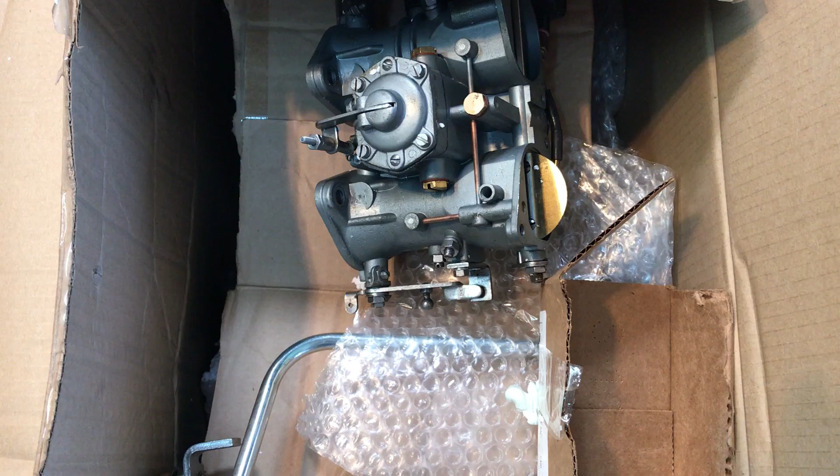Hello, Brian. Here are your carburetors that you sent that have been rebuilt. Let's make some observations here real quick as we unpack them. This is way too much thread showing here, almost like you won't have any accelerator pump, or way too much accelerator pump. The only way we're going to know is get on the bench and test it.

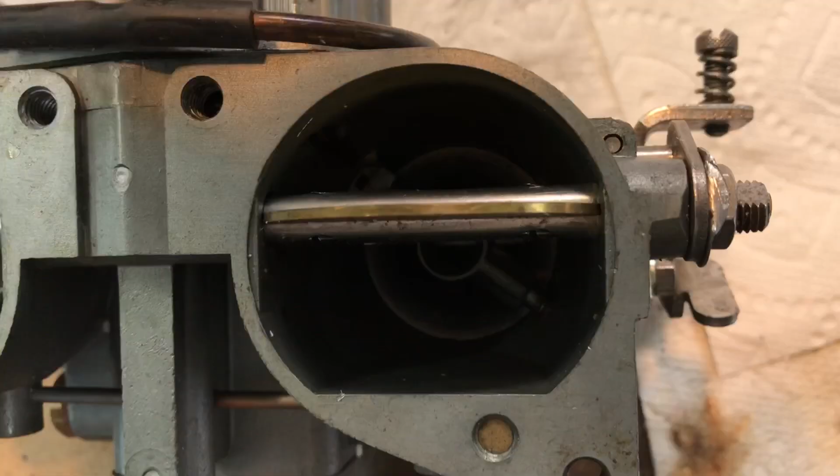I like to double check the float bowl levels and then see how much is actually being discharged through the nozzle right up in here, and that is a function of how much adjustment we've got right here. Let's see what else we got. Don't need this, just a vent tube at the top of the carburetors.

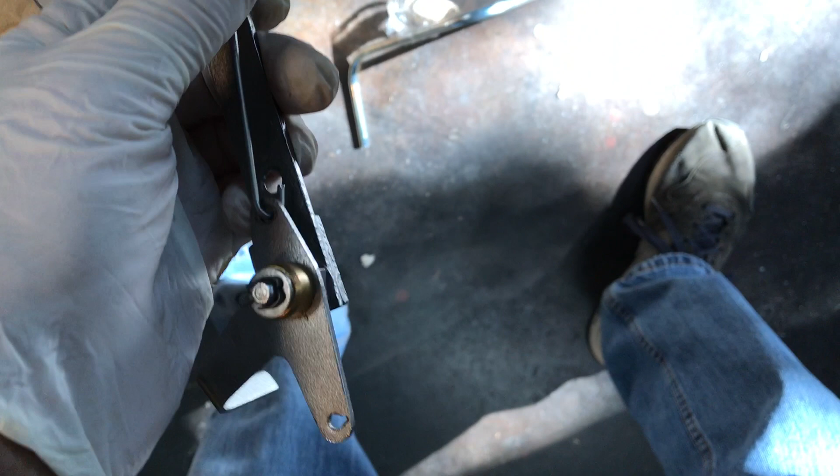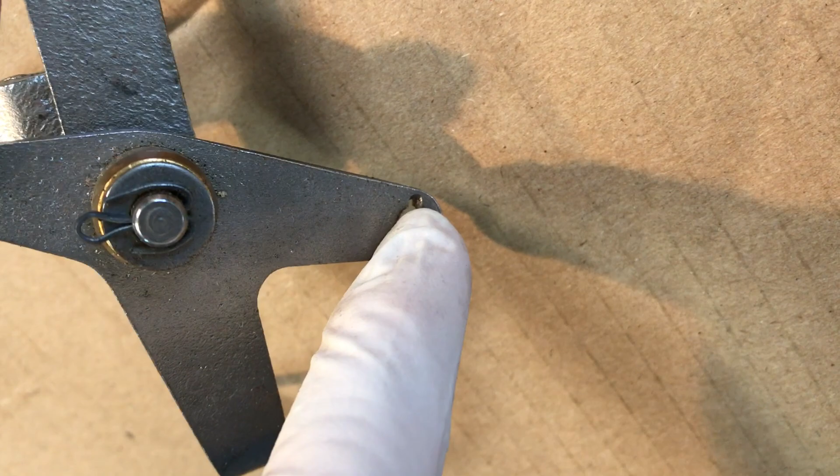You don't need a hot choke mechanism, which is, by the way, missing a spring that goes from here. You can see where the spring is dug into the arm right here, and then the spring attaches over to this point over here, and you should see the spring have dug in underneath. There, that's where the spring grabs, so you're missing your spring.

Let's slice this open. See what we got here. Here's the second carburetor hiding someplace. I don't know why I've got this fuel line and why it's chopped in half. What we got down here? Oh, carburetor hiding. Nice. Get all the bits out of it here. Let's see what we got.

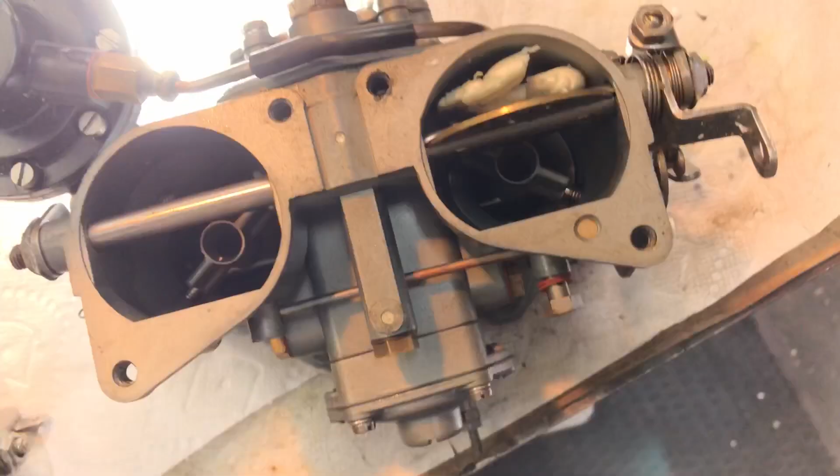Alright, first we're going to check our pre-atomizers. Okay, let's see, these things are going crosswise in the throats, and they're supposed to be tight in there. This one is not very tight, or not tight enough. But then what happened? Let's explain it to you here.

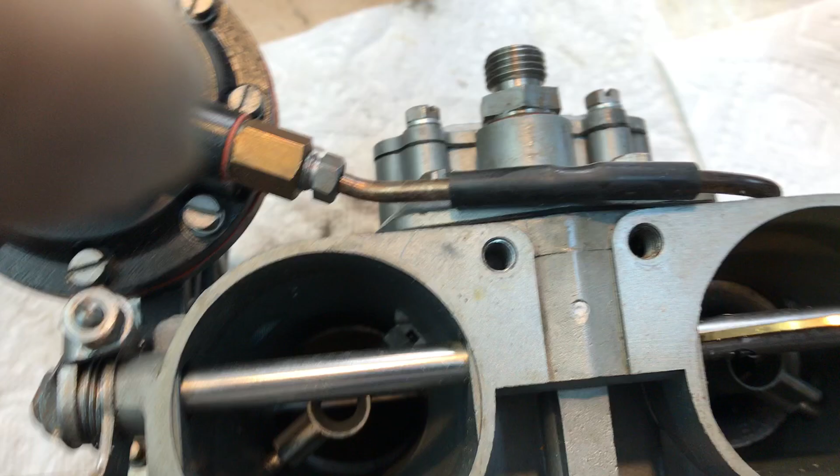You know what I need to do? Let me get my headlight here on so I can use my fingers for pointing. All right, much better.

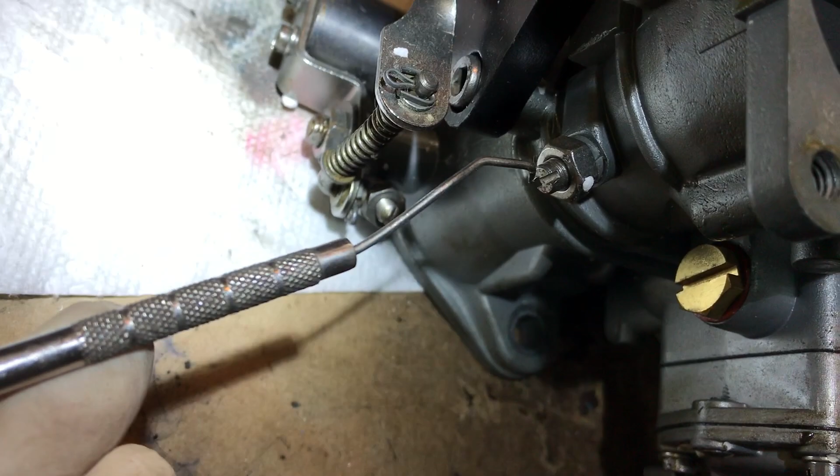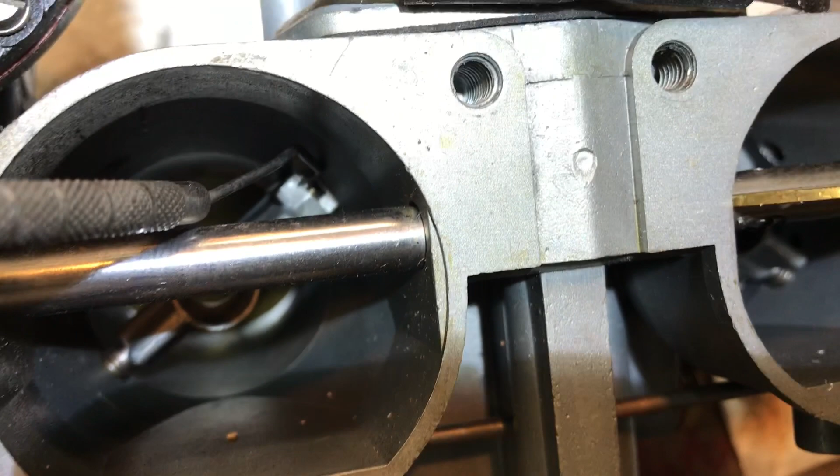Pointer. All right. This is a mechanical seal right here. That means there is nothing in here to keep these from leaking except the actual pressure of this jam screw and nut forcing this pot metal and a pre-atomizer up against the inside of the body of the carburetor. And that means you gotta have these things on there really tight. And if they're not tight, they leak fuel right here, because this is a direct pathway right into the float bowl. There's just a giant hole right up inside here for the fuel to get up in there.

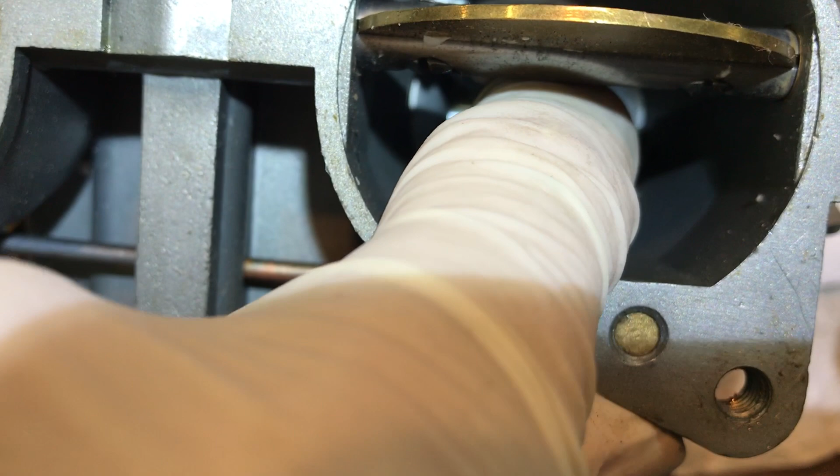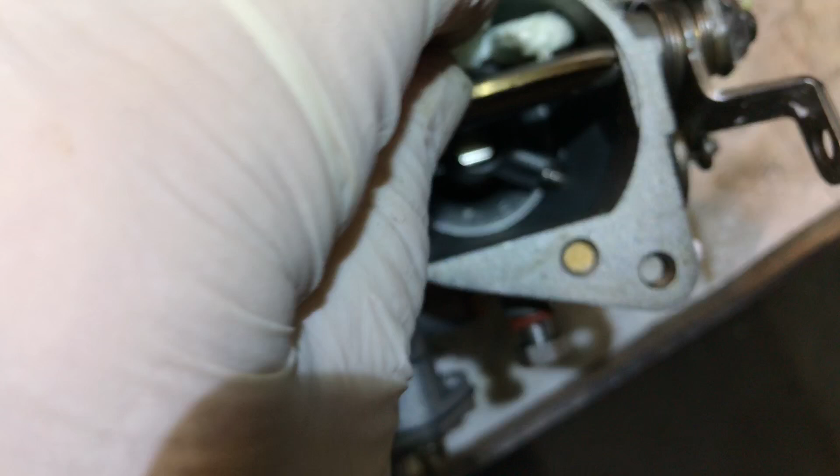All right, check this one. It's not too bad. All right, let's see if we can get our fingers in here. This one. Okay. Not too bad. I still would like to pull them out and check them for contact. So let's see. I was going to check the other carburetor for the accelerator pump.

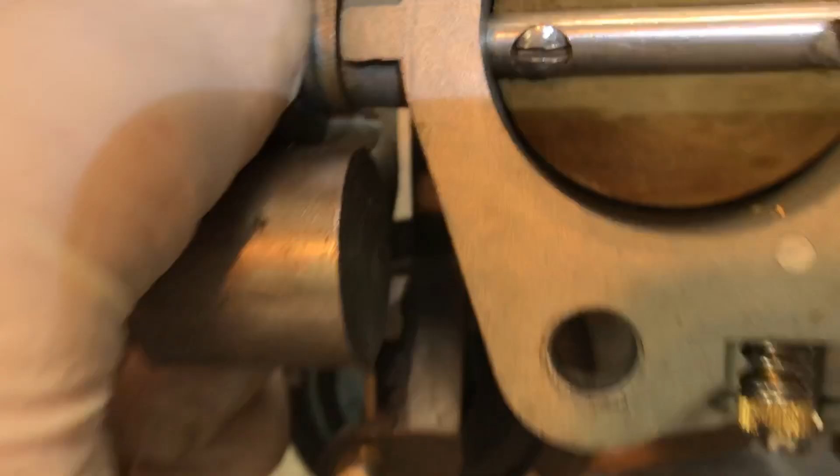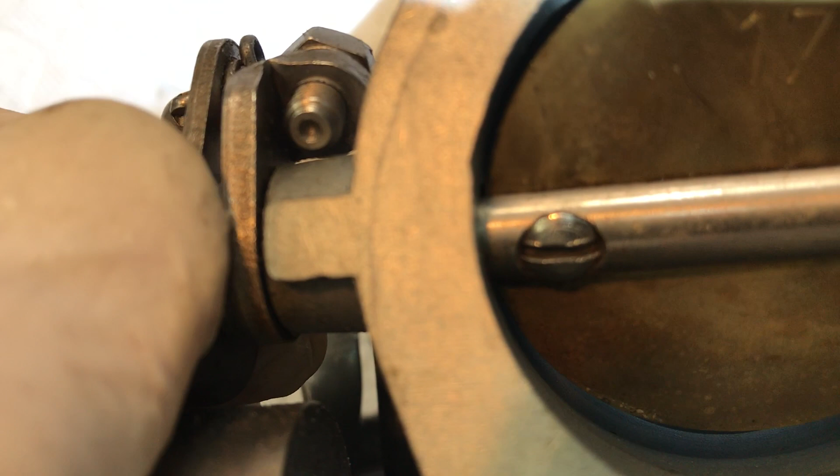Threaded rod. All right. Now, what I was telling you over the phone is when I pulled one of these out, what I did was, understand here, you've got what looks like the original butterflies in here. Original butterfly screws. This is way too much slop in here. Way too much slop. Can you hear it?

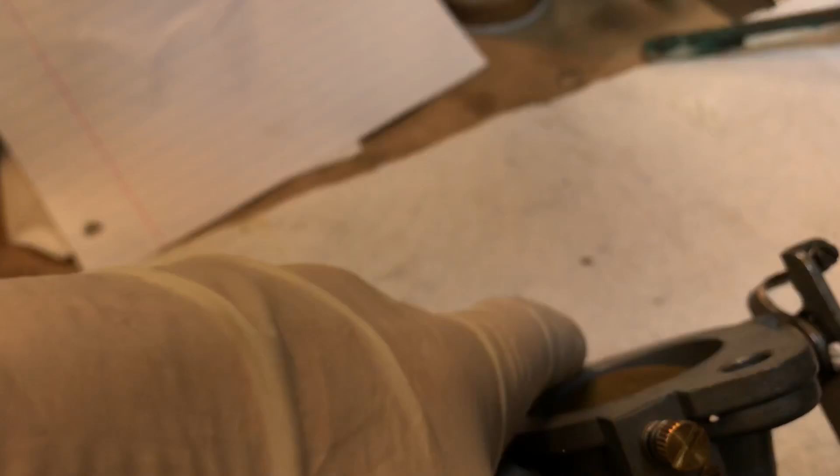As I said, when I look through the throat of the carburetor, you have to hold it up to the sun. It's the only way you're going to see anything. But let's see if I can duplicate it here with a bright light behind here. All right, can you see that? This is supposedly closed, and yet you can see light coming through there. Well, that means it won't idle properly. Same thing here. This one is closed.

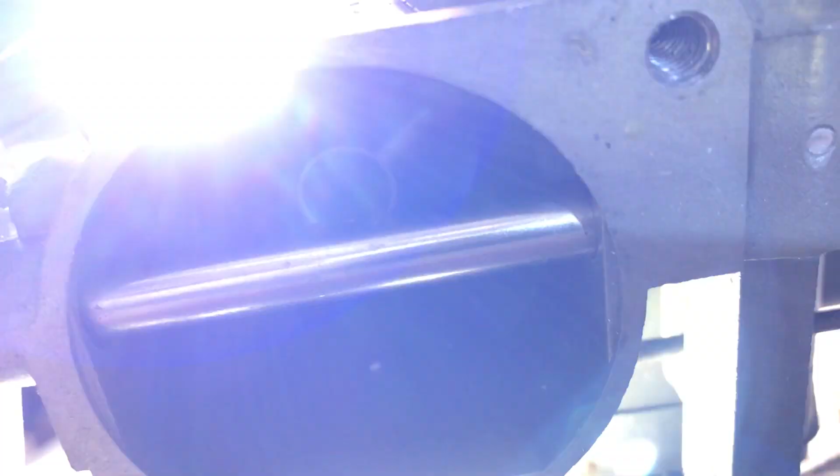Let's take a look, see what we got here. All right. Well, I might as well not even put them on the test engine. I'm just wasting my time and your money. But I'll do it anyway, just to give you an idea of how much air is flowing through here. But let's do this again. Make sure that I didn't move it or anything. Yeah, you can see the light flashing back there.

It's just like non-existent. And so these are supposed to idle on the first barrel of each carburetor only. First barrel only. Problem is, if this barrel is open, it's going to start processing air through here, and you're going to have to start adjusting your idle mixture screw to give you the proper fuel into this throat. But this is supposed to be completely closed off because it's not supposed to be processing any air. It's supposed to idle only on the first barrel.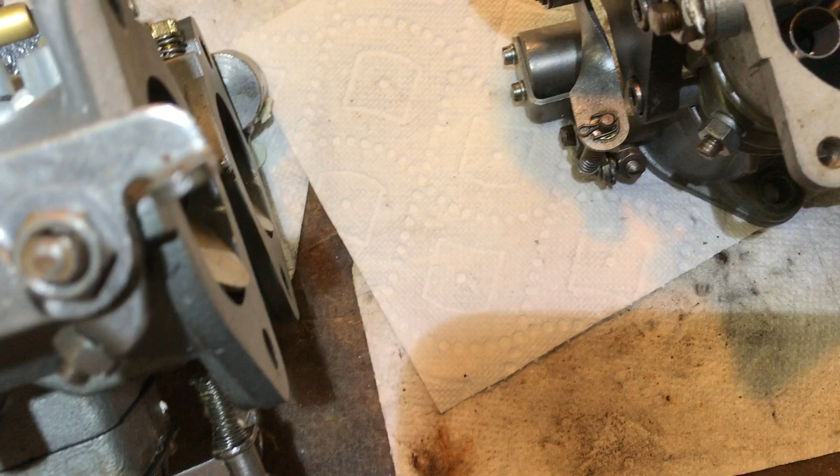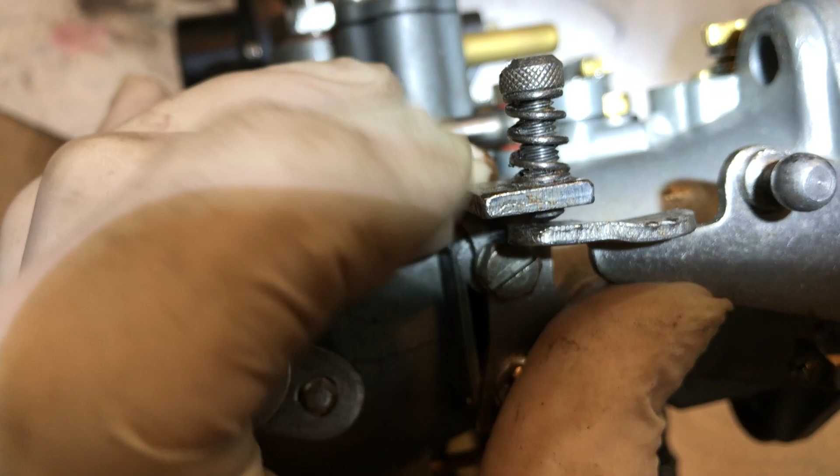Let's take a look here. Something strange going on here, because this is just barely touching, and you should have more threads coming out of the idle adjusting screw. Okay. Same with this. In fact, this one here has been bent for some odd reason.

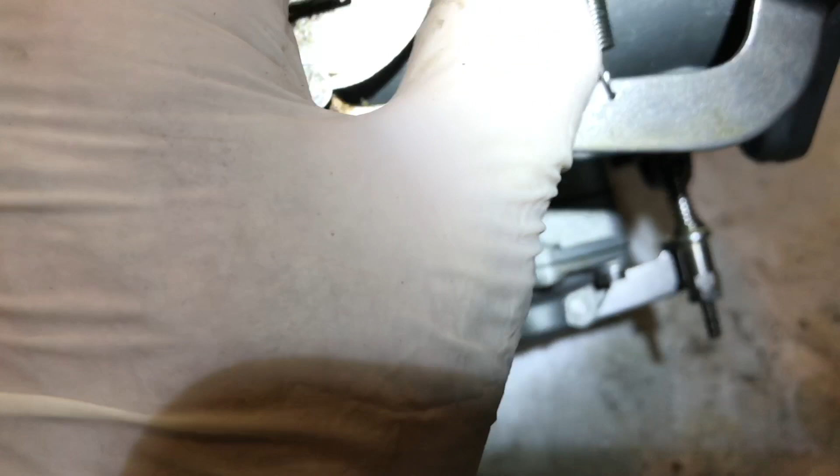This is supposed to be straight right here. This is supposed to be straight, not bent. And there's just no threads here to contact. All right, that just doesn't make sense.

So, but you've got, okay, and you got a ridge in here. Can you see that ridge? Let's see if I can get. Yeah, can you see that ridge right there? That's the second barrel, it's supposed to slam home.

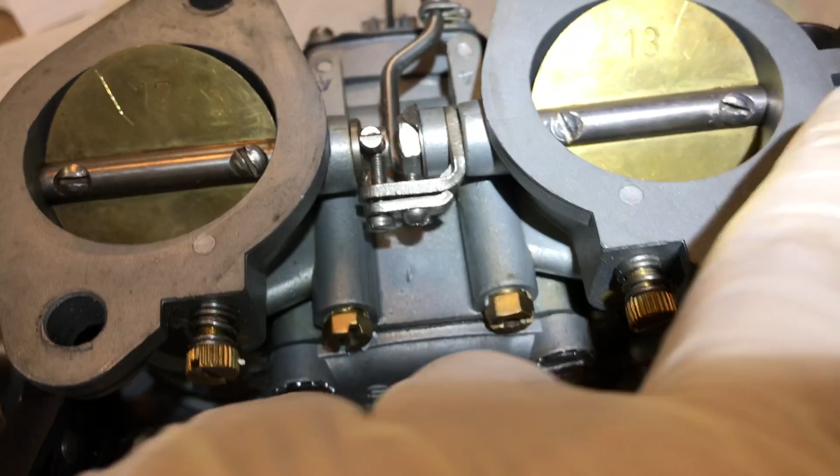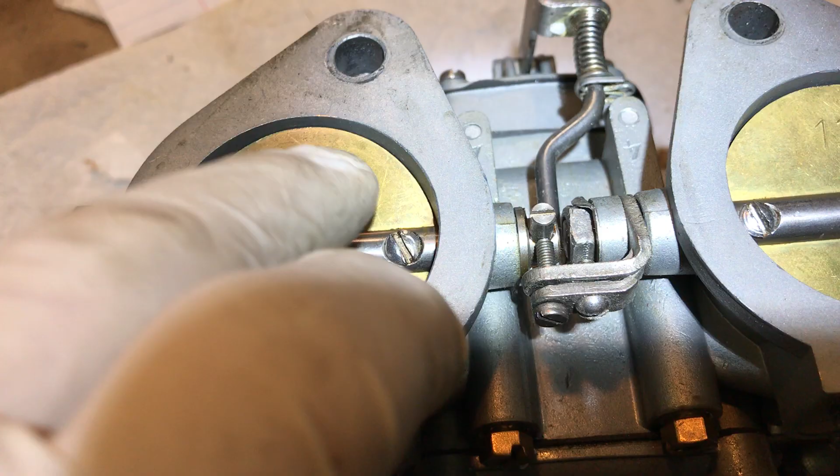Let's say you've accelerated and you got both barrels open, and then you back off on the throttle. Well, the throttle linkage is here, backs off the throttle. It slams it shut here, and then you got this mechanical linkage right here that forces the second barrel closed, and what it does is slams home, and it makes a ridge in here because this is supposed to slam home and close off completely.

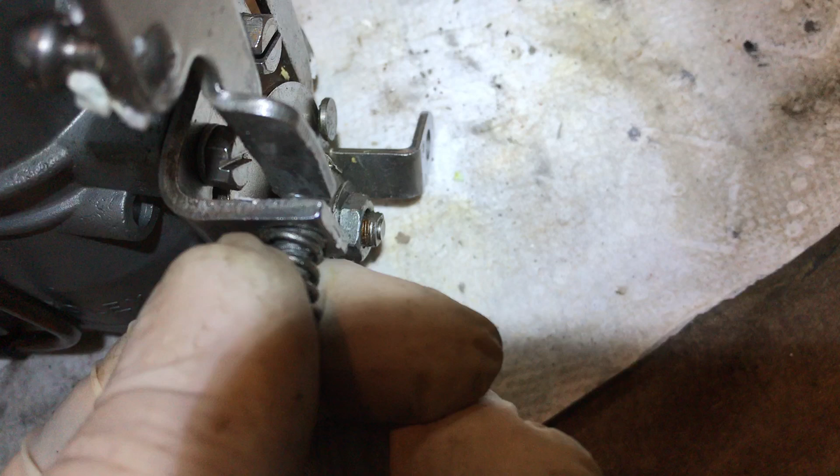There's no ridge, never a ridge in the first barrel because the first barrel never closes completely. In order to set these things up to begin with, you back off on the screw here until this is completely closed, and then you screw this in 1.5 turns, and that's your initial setting for idle. And then after that, you do your idle settings with this screw right here, and this never closes. That's why there's never a ridge inside the first barrel.

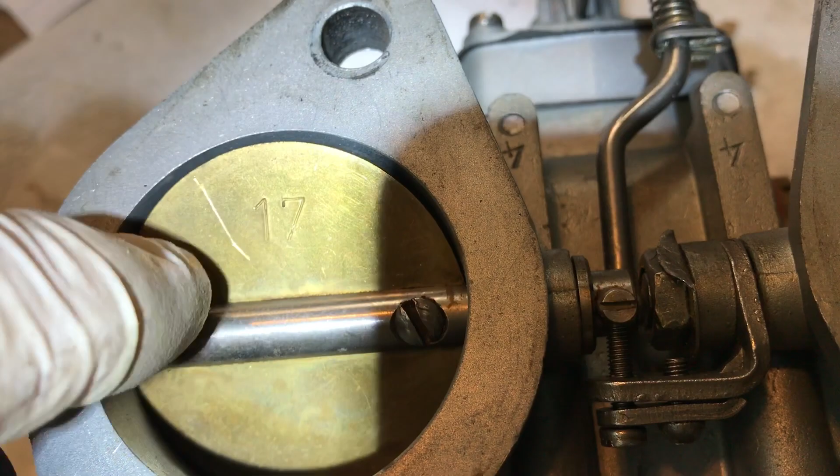But there's one on the second barrel, which means that this is not going to close completely because as you wear this ridge in here, and the throttle shafts wear, you get an oval shaped pattern in here, and so the butterfly never closes in the same place and never closes at all. Let's see what this one has to say for itself. Okay, ridge in there as well. So again, these are not going to close off and seal. All right.

Although they were trying to, because you should have a little bit of play. So I'm holding, it's hard to do with one hand. All right, I'm going to hold this closed right here and come over here and see if we got any play on the second barrel, and we don't. See, this should be adjusted so we have just a little bit of slop in this butterfly right here,

and we don't. So what that means is that if you screw this in too far to try to force this closed, it's possible to actually force this closed, screw this in too far, and then you are artificially opening the first barrel to where you have an idle that is adjusted by this screw and not by this screw.

So let's take a look and see what we got in the way of our float, just for fun. We'll check our float settings here. I don't know what the camera's pointed at, but it doesn't matter because it's going to take me a second to undo these. Let's see what we got in the way of float settings. And also we're going to inspect the check valve inside the carburetor. We call it the calibrating sleeve, and see what it looks like in here.

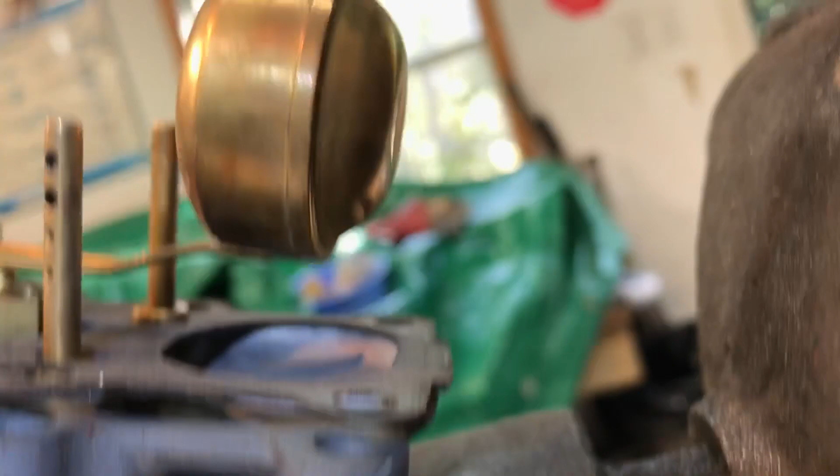So first of all, we're going to take a look at our float level. Okay. So we want float level 39 to 40, and what we're measuring is this little. There's a half moon right here. Let's see if I can make that more.

Maybe I should get a GoPro. That might work a little bit better.

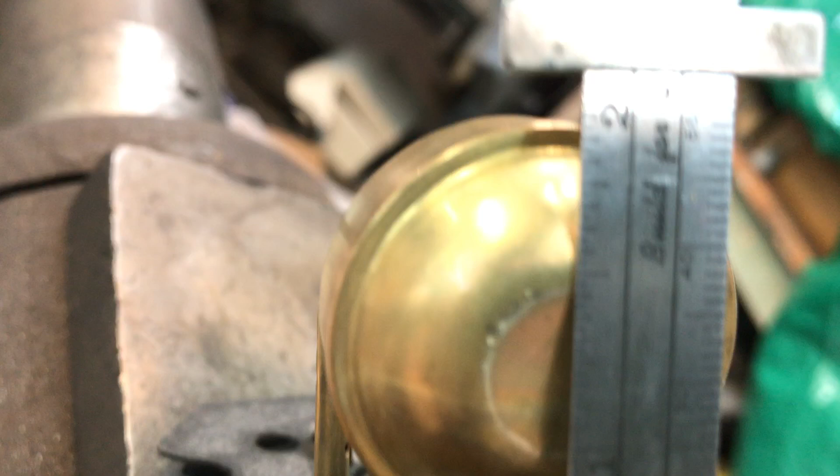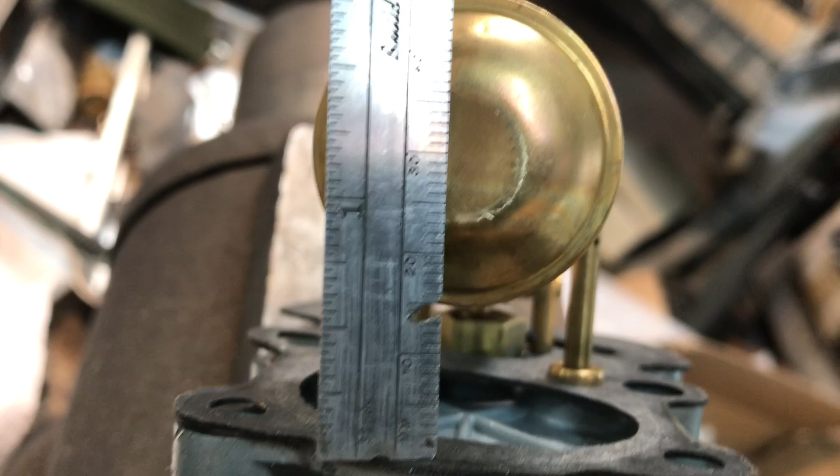Okay. I said a half moon. It's not. It's a full circle, but you just use the top half of it. All right. This is what you want right here. And what we're looking for is from here up to here. Let's see if I can see this. From the gasket up to the, hard to see through the camera. So we're measuring at that half circle there, or the top of the circle. We're going to this top of the circle right here.

Let me get my glasses on so you can see this. Sorry for the bad camera work, but I'm just pressed for time and I don't have a GoPro.

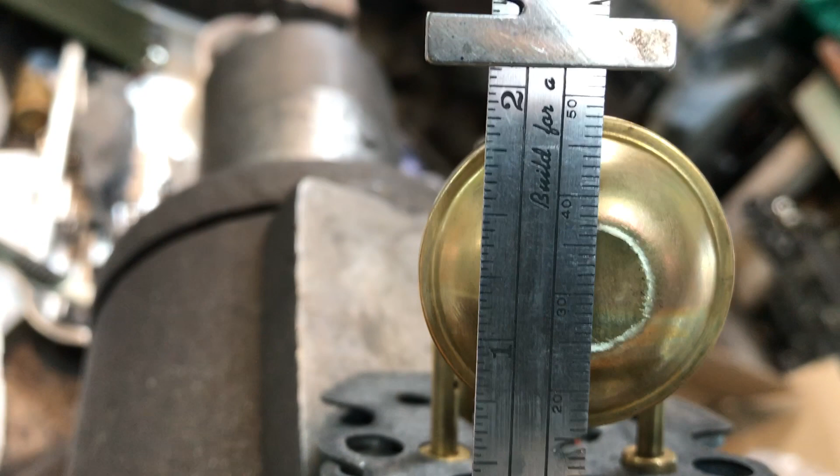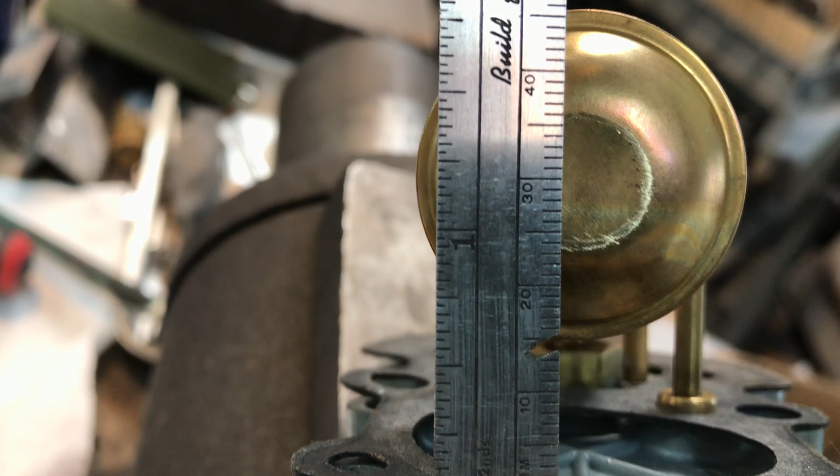So it looks like our float level is 36. And from the gasket, okay, there's 30, 35, 36, and we should be at 39 to 40. So the float level is too low. Or, let's see, it's going to be too high. Anyway, it's incorrect.

All right. Also, I don't understand why you've got stripped out threads right here. We always helicoil these threads, top and bottom, or sides and the bottom. The pot metal pulls out. Also, got these black gaskets here. The correct original gaskets are red. That's what the correct original gaskets should look like, and they have the best ability to withstand the miserable fuels we have these days.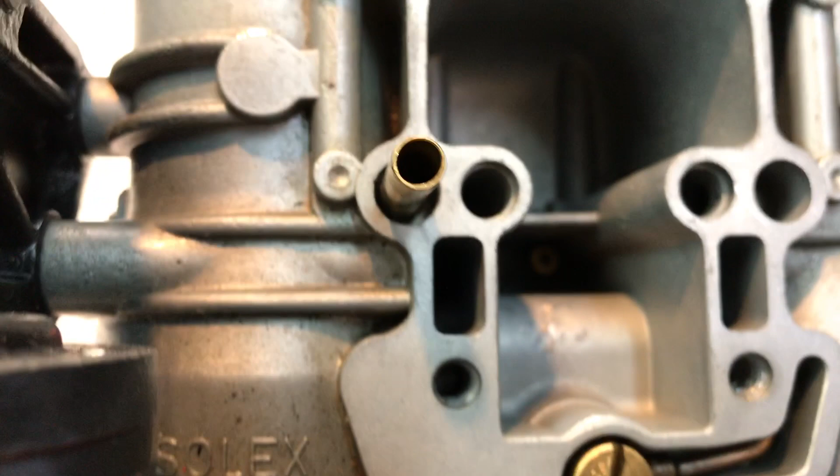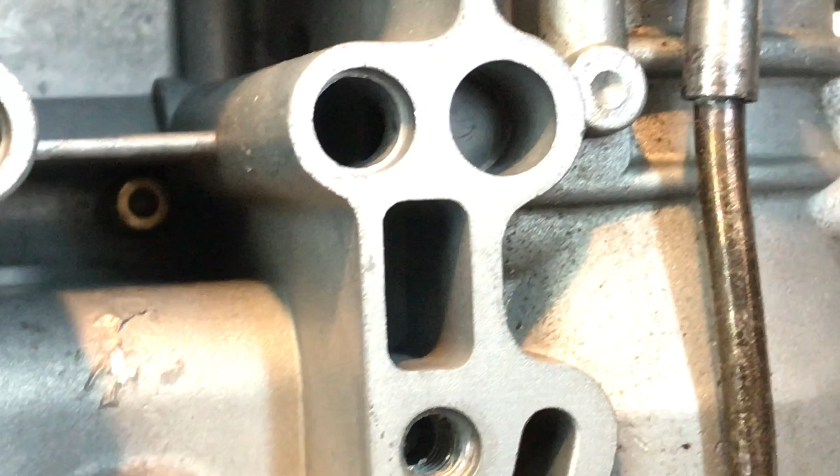Also, as I say, we're going to check the calibrating sleeve down inside here. It's hard to. Anyway, it's this little fella down inside here. It's impossible. I wonder if I can turn the flash on this thing. Anyway, can you see down there? That little brass thing right there is a calibrating sleeve. It has to measure discreetly the fuel going into the accelerator pump diaphragm.

Oh, hang on, I got a delivery. Yeah, come on in.